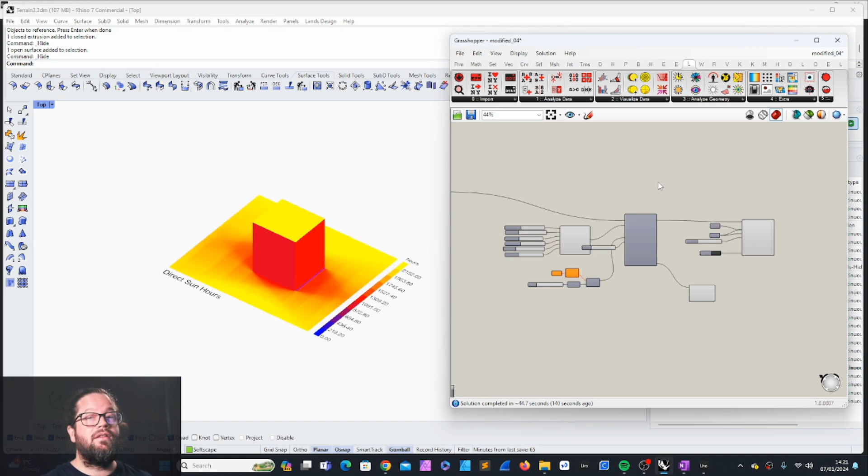We analyzed geometry, and we used the first item here, the direct sun hours. Now, direct sun hours is the first tool here where we actually analyze geometry. And back then I said we need to have a model first - some sort of model, ideally a simple massing model, in order to start using these tools. Now I want to dive a bit deeper because of what I said before.

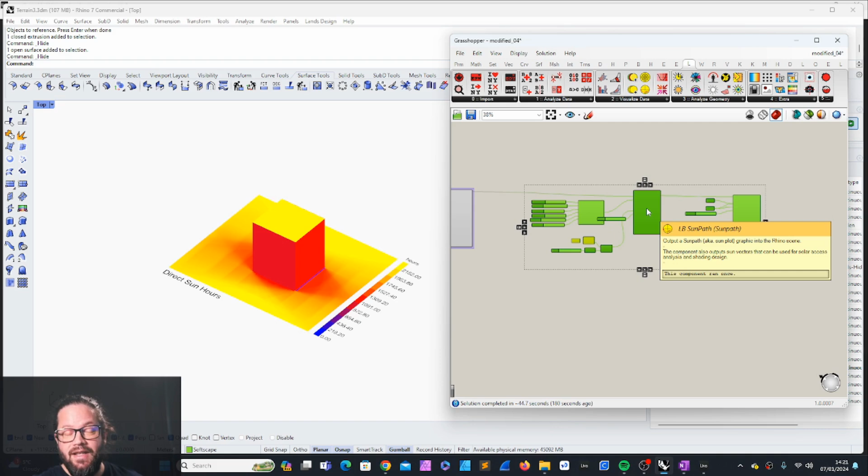A sun hour study is not just a sun hour study. What it's supposed to do is trigger a response. It's not just a tick box exercise because your client brief says you need to deliver a sun hour study. No, there you can set yourself apart from others - make a sun hour study, but then use it to your advantage.

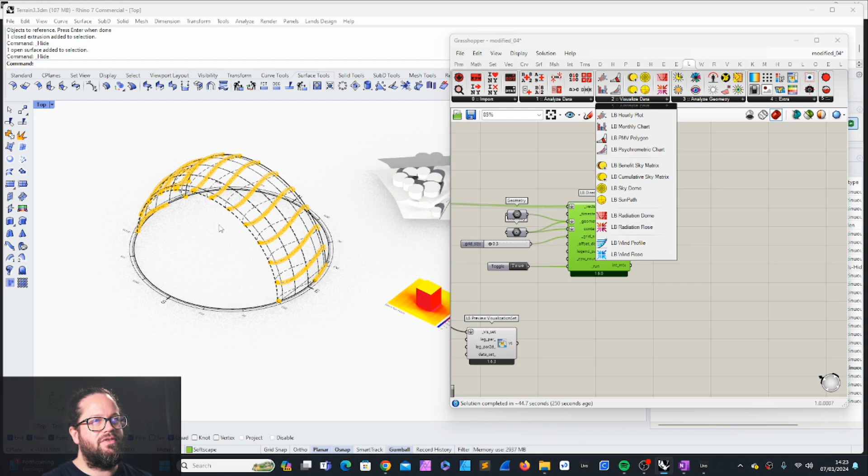Now I want to talk quickly about what a sun hour study really is. In that case, it's called direct sun hours - this is an important element. I'll read through this so you hopefully get a better understanding: calculate the number of hours of direct sunlight received by the geometry using sun vectors obtained from the Ladybug sun path component. So back then we built this sun path - this is our Ladybug sun path tool, and it creates vectors from the position of the sunlight to the model, and the vectors are used to create this heat map.

The heat map is not about temperature. It's about showing how much sunlight, how much direct sun hours were hitting the surface. I'll explain a bit more about that in a bit.

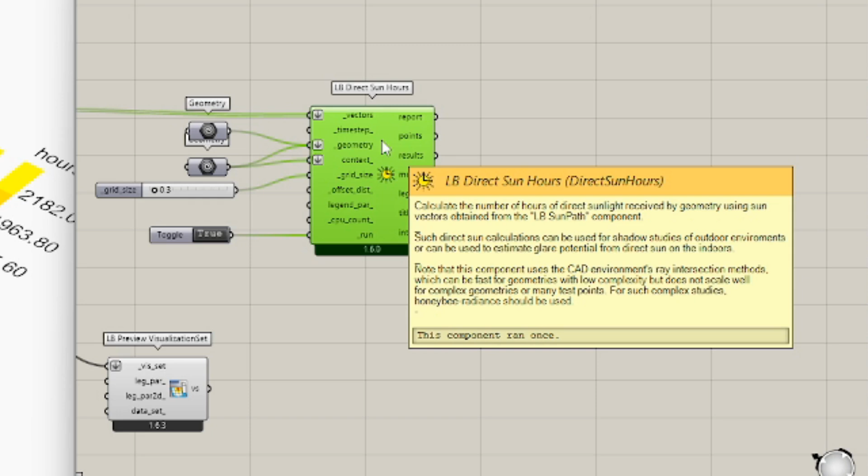Such direct sun calculations can be used for shadow studies of outdoor environments, or to estimate glare potential from direct sun indoors. There is way more to that, it's not just to create a sun study. That's already the misconception. Yes, sun study or shadow study, yes of course, but for what?

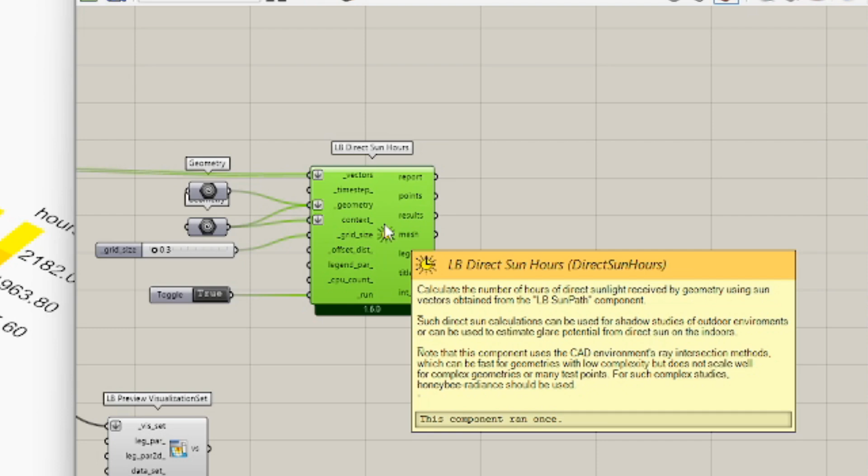Note that this component uses the CAD environment's ray intersection method, which can be fast for geometries with low complexity, but does not scale well for complex geometries or many test points. For such complex studies, honeybee radiance should be used. I agree, but this is the first point for you to understand what's going on.

What do we need for this study? We need the sun path, and we need the direct sun hour study tool. We need a geometry, which is the geometry we want to test, and we need a context, which is the shading element. In our case, I use the context also as geometry to be tested - in that case, the building. So in this geometry slot is the building, but it's geometry and context at the same time.

So for example, I could have a shading device, a shading element, and I'm not interested in calculating how much sunlight hits this thing. So I can just place it into the context only if I want that.

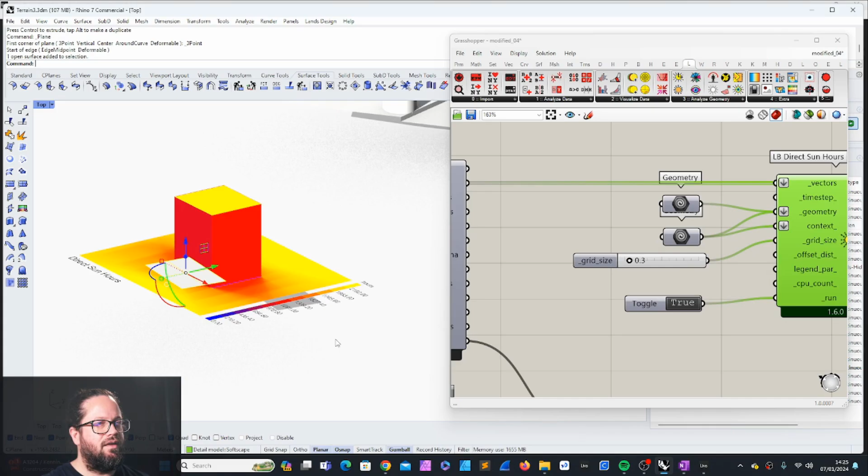Let's do that. By the way, don't do this - stop your grasshopper calculation and then choose your geometry. Not like me now, where I just choose the geometry and now I need to recalculate everything, although I haven't chosen everything yet. I will lock this first. If you click on your wheel, you can lock your grasshopper and then it doesn't calculate.

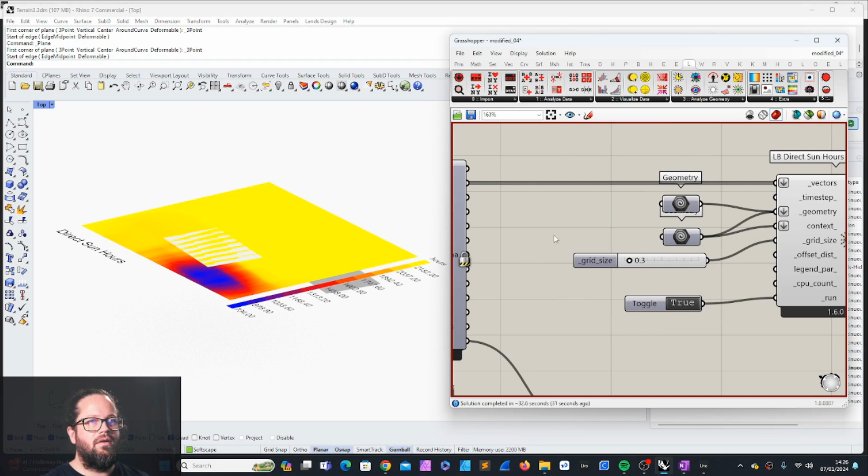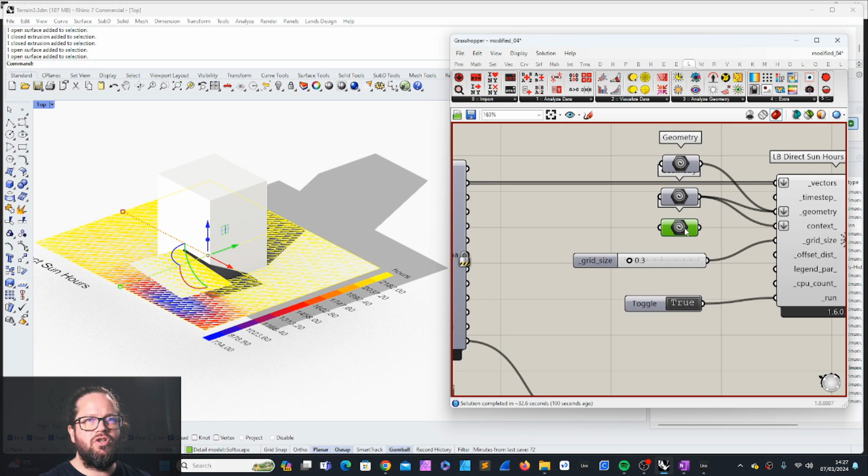As you can see here, we have the building, we have this shading element, and we have the ground surface. Now the ground surface is my geometry I want to test, and I also want to test the building, but the building makes shadows, so I also use it as context. Now I could add a third one here and say this is only shading, this is only context, so I can plug this in here together.

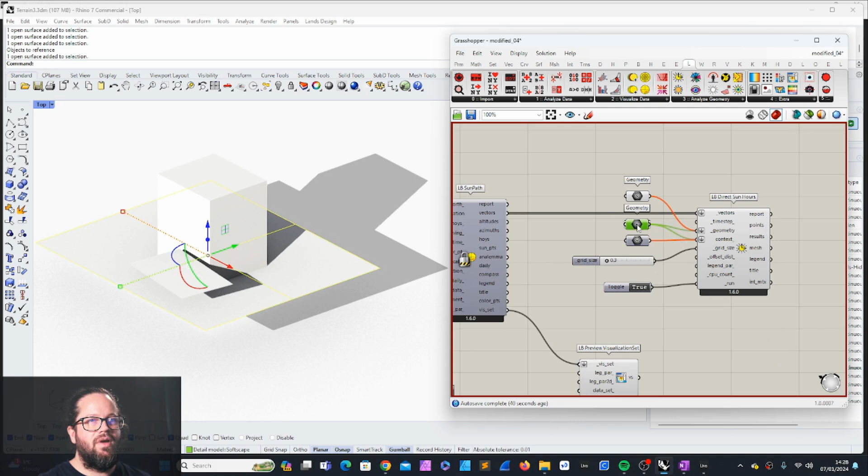So we have a geometry, which is what's here. Maybe I'll show - not disable, preview - oh, that doesn't work if it's locked. Okay, I have my ground plane here in the geometry, and probably the best way is to rename this. Anyway, we have our building in here, and we have our shading in here, which is only context - I'm not testing the surface itself.

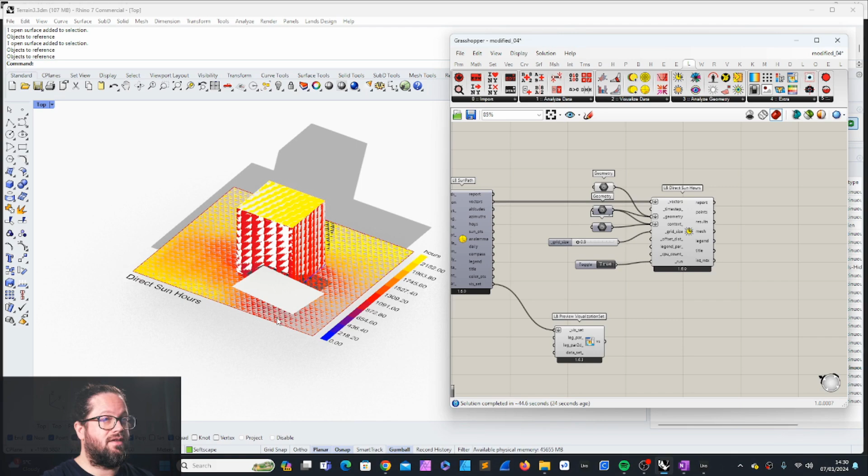So I can do this, and now I can unlock my solver. So that looks very weird, and a lot of people ask me why do I have these stripes. It's because this tool creates a new mesh with the colors baked into it. So you have your geometry in Rhino, and on top of that you have a mesh which has a color, and that's overlapping. That's why we can just take this and hide it.

Now you can see that we have shading here, this is from our shading element, and then we have building as part of the shading but also part of the geometry we want to test. And then we have the ground plane. So that's one thing, that's how it works.

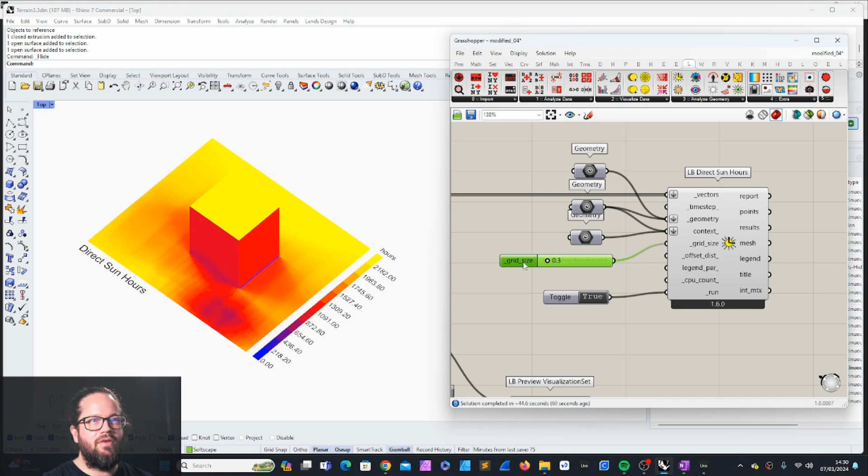And then we have the grid size. This grid size is actually quite small, that's why it takes quite long. I will change that so the calculation is faster. Go back here and I'll say 1 meter grid. I will just turn this on again.

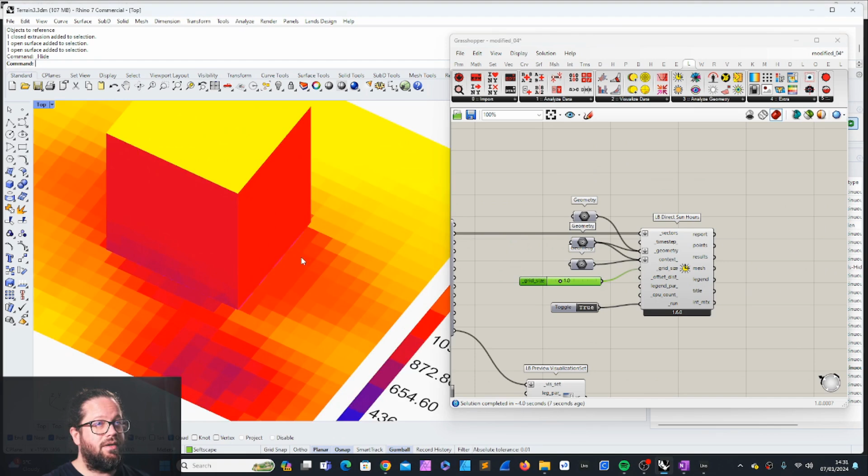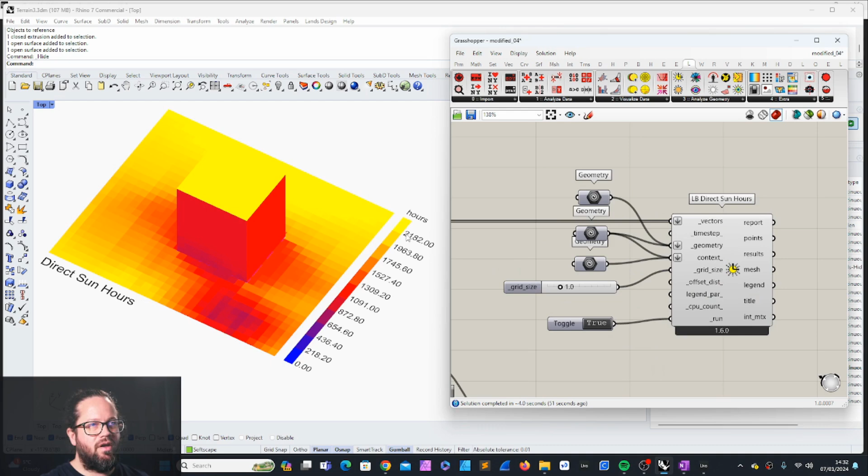So now it's probably better to explain what's happening. It says here hours, 2182 hours. Yellow means that in the testing period, which in that case is a half year, from January to June end of June, there are 2182 sun hours on these yellow bits. That means yellow areas get the most sunlight.

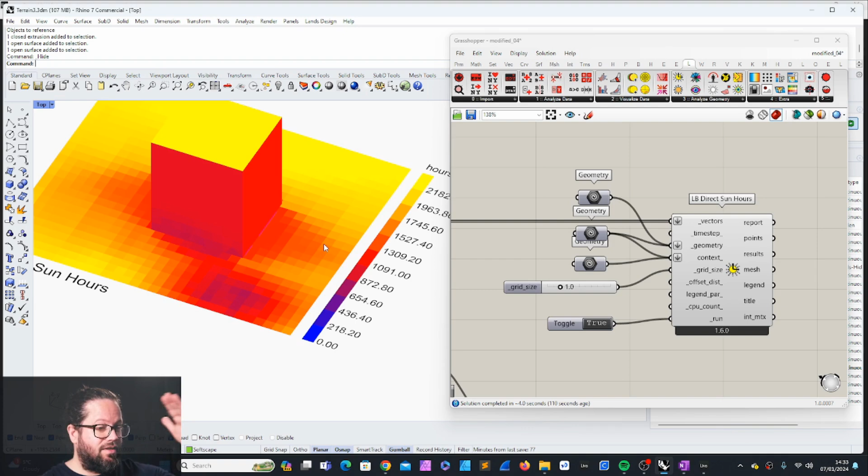So imagine how it works. The sun comes up, and on each of these squares it's tested if the sunlight hits the surface or not. If it does, it becomes 1 point. If not, it becomes 0. Next hour, a few others which were before in the shadow now also get the sun, so they get 1 point. So then some squares have 2 points, one has 0, one has 1 point, and so on. It goes through the whole year or half year or whatever period you choose, and adds everything up for each cell, giving you the exact number of hours per cell.

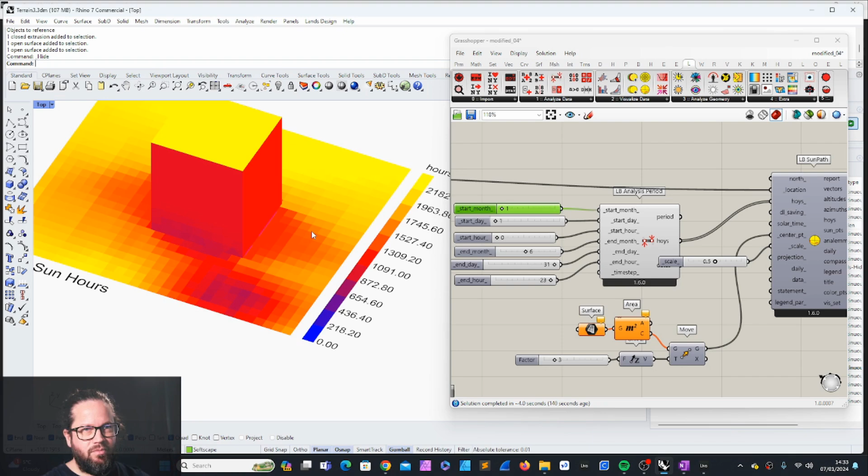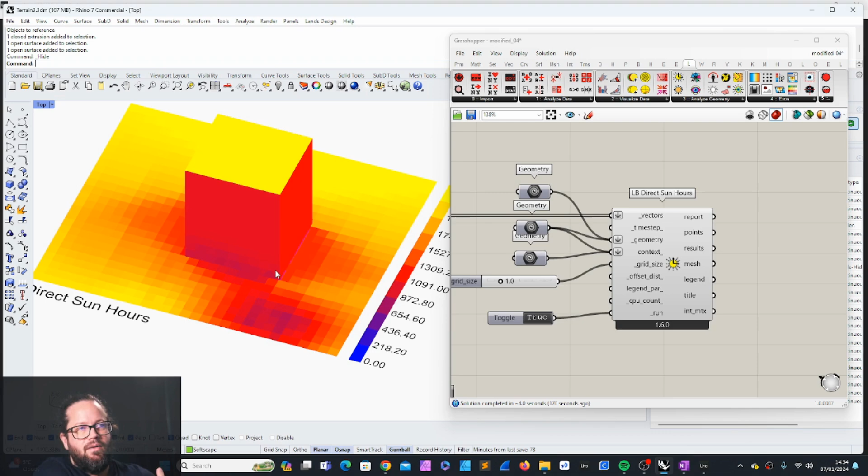And we talk about direct sun hours. There is no reflection from any surface, it's only the direct sun hours. It's very important, a lot of people don't understand that. They think, oh, I'll never get any sunlight here, so these spaces are completely useless. It's not true, because you get daylight. Daylight includes the sky also, so skylight, reflection from surfaces and so on also creates light. But this study is only about the direct sun hours.

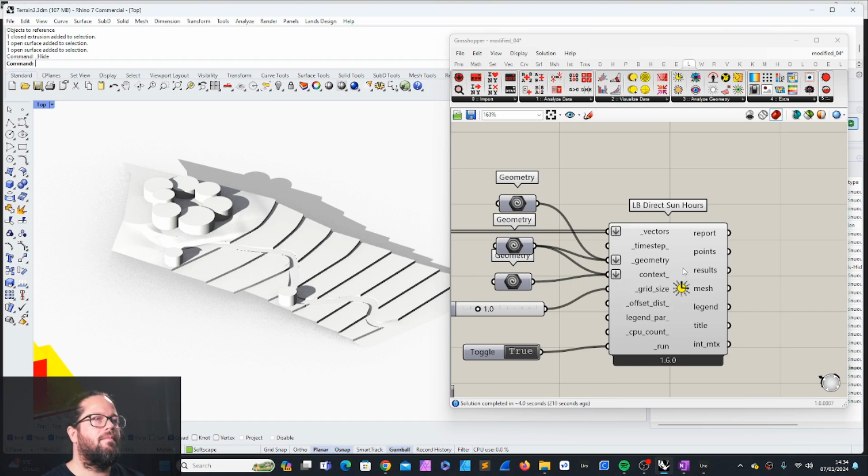Now, as you remember, we have our model. We created a simple model, that's what's in the description also. We need a simple model in order to run this, otherwise the calculation is quite long. You can run more complex models, but it's better to use Honeybee. In that case, I deliberately created a relatively simple model where we can run our sun hour study, and I will not use this extra shading.

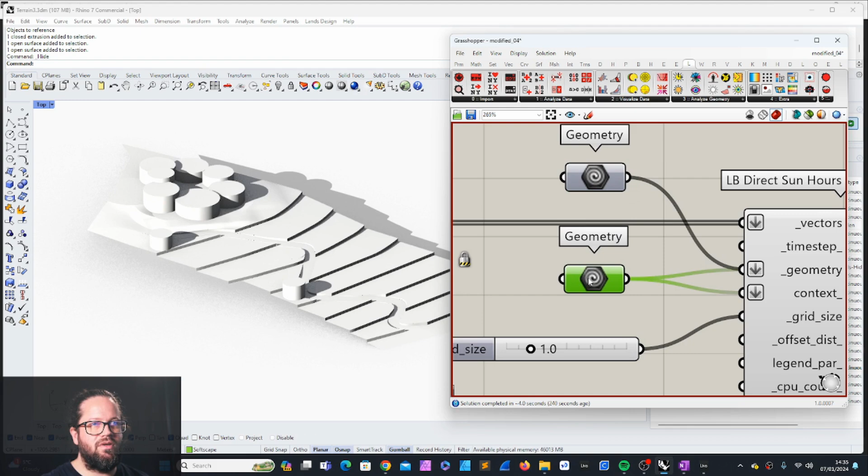Let's lock this again, I'm gonna delete this. I want to test everything, so I don't actually need this part here. I'll just take everything and put it into this geometry slot. That makes sure that I use everything as context, but also as geometry which should be tested, so basically self-shading elements are included.

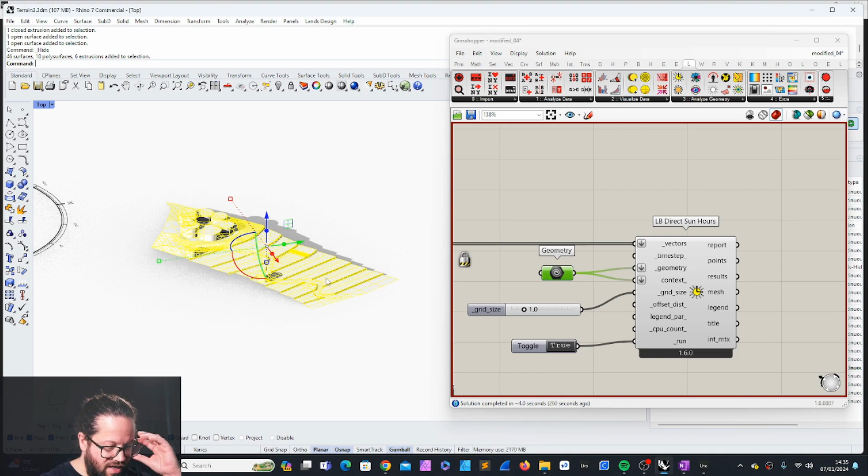So I go here, check first. Let's see... okay, 46 surfaces, 18 poly surfaces, 6 extrusions added to selection. I just check this because I want to make sure I don't choose any lines or curves and so on. All right, so I can select all this and then set multiple geometry.

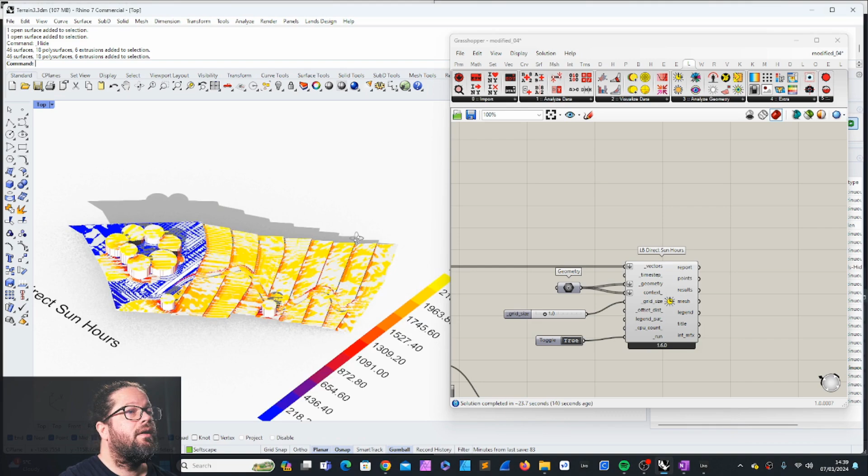Now this will take a bit, but let's do this. Just unlock and let's see how long it takes. Okay, that was fairly quick, and we already can see there's a problem. So I will go back here, I will lock this, and we need to fix some stuff here.

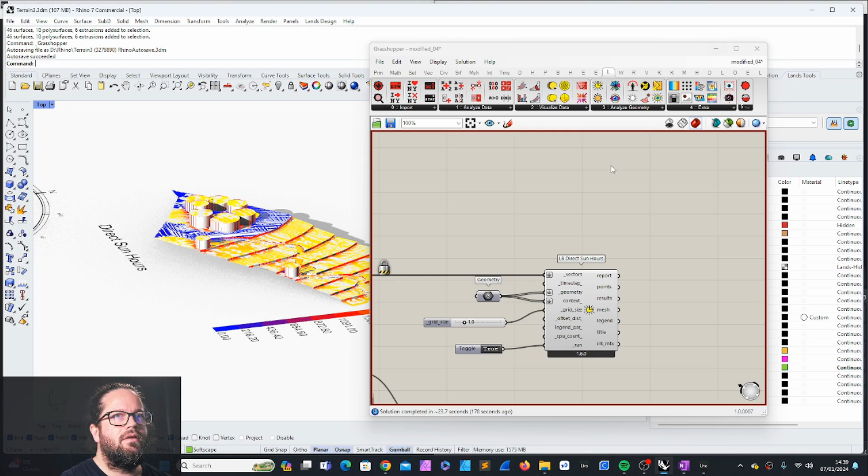Maybe let's hide this first. By the way, closing this window doesn't remove our Grasshopper script, it only closes it. So if I click here, it's still here, everything's here, even the calculation, nothing's gone. If I just minimize it, you will still see everything. If I click it away, then it's closed. And that's what we want, because we need to fix something here first.

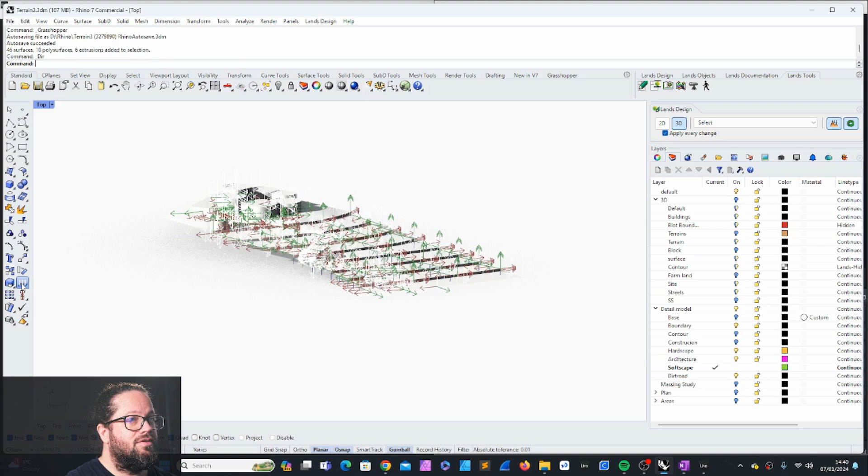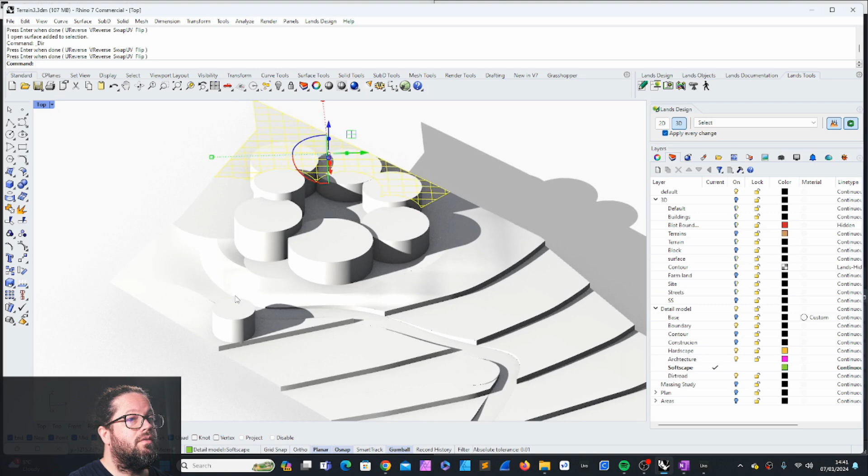This is a problem that comes up quite often, and people are confused why this happens. I need to check my orientation of the different surfaces. It seems like the surface, maybe let's go back here. This is actually quite good, so it seems like these are all fine, but these are not. There's something wrong here, it's the inner courtyard, and also this one. See, it's upside down. Let's check this one, it's also upside down. This one, that's correct. Maybe it's easier with the shaded viewport. That's now okay.

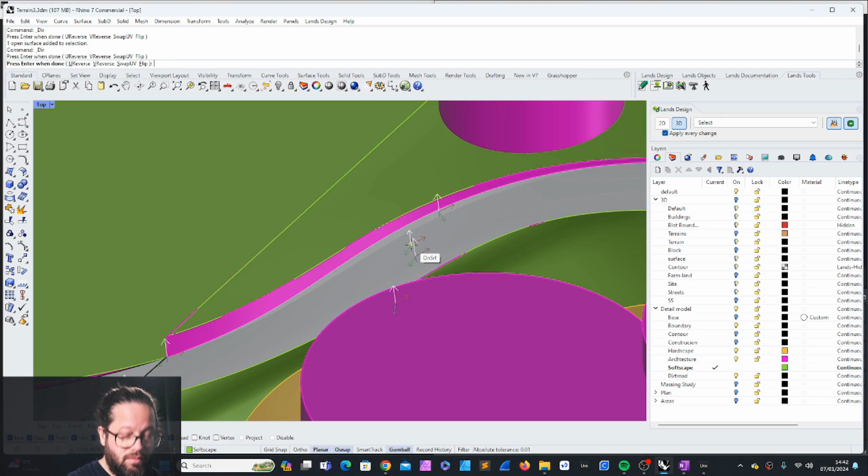This needs to be flipped. That's good, that's also good. This is wrong, now we can do it again. So flipping these makes sure that we calculate the sun hour studies on the right side of the geometry. Otherwise it shows blue, says 0 hours, although they're completely exposed, and a lot of people get confused by that, they don't know how to deal with this. So I just unlock this again, and let's go.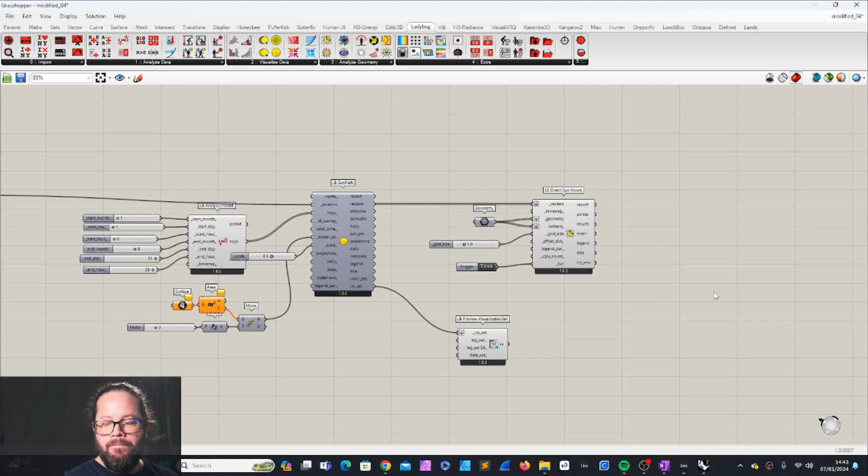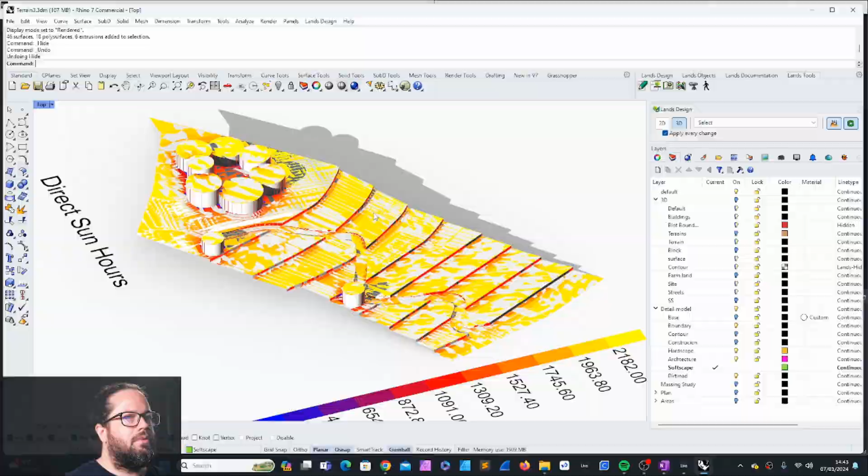And because we use a meter grid, it actually goes very quick. Let's go back to the rendered viewport, and what I want to do is grab all these and hide. Oops, that was not good. Why did this happen? For some reason there's some bug here with the rendered viewport. Anyway, we can just use our shaded viewport instead. It's totally fine, because this is a colored mesh anyway, so no problem here.

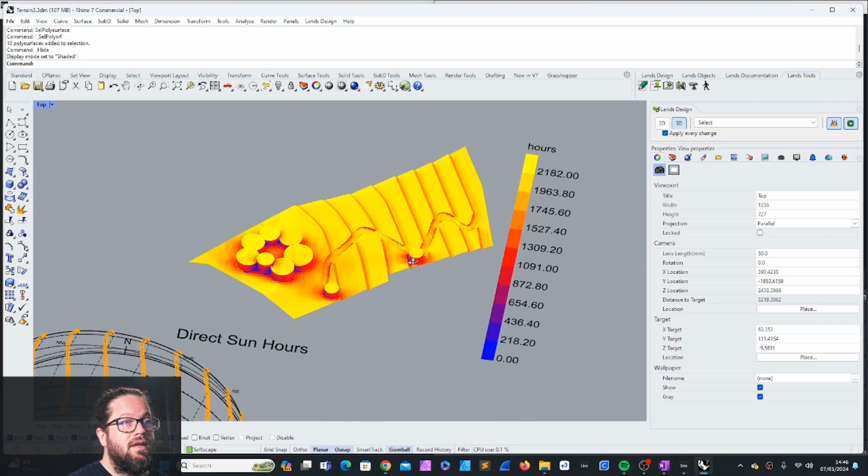Now, so we have our sun hour study, and this is for a half year. It's faster than calculating the whole year, and the sun will pretty much move in the same way, just reversed. So that's why if you want the whole year, you just add up or multiply these numbers by 2. It's gonna be more or less the same output, really.

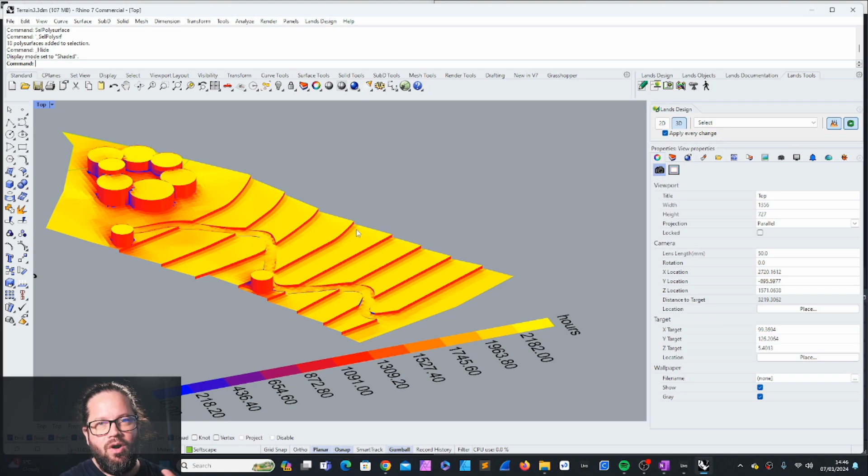A few things to say here on this output. Although we try to generate the grid, some surfaces are harder to create this grid surface on top of, that's why they look more jagged. They have these triangulated edges.

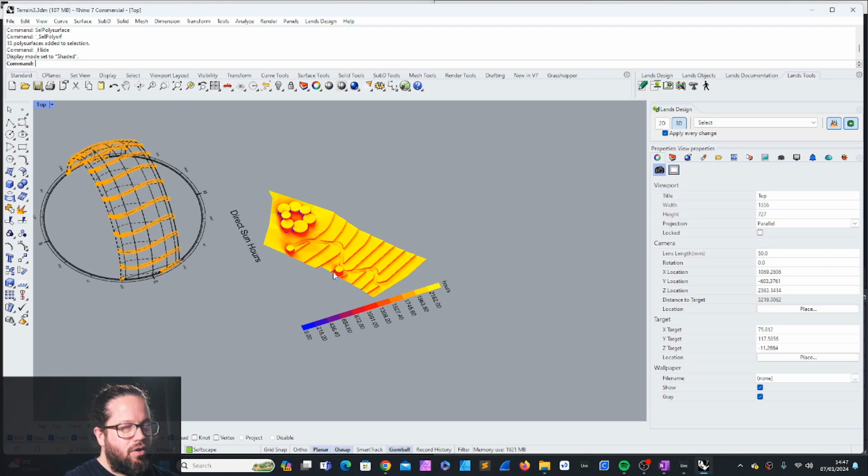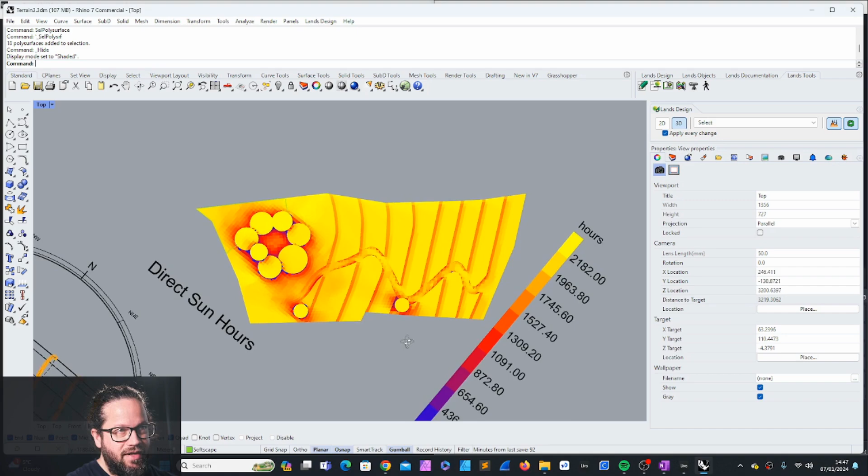Well, we get a lot of sunlight, no question there. We haven't yet put any trees or anything, but we can see that we get less sunlight in here. That means because it's a courtyard, sometimes you get no sunlight in the morning or in the afternoon, whereas all the other areas actually still get sunlight. And that's actually a start for us on how we could use that. Now imagine this in a different place, because this is very close to the equator. In a more Nordic country, for example, it would probably be much different.

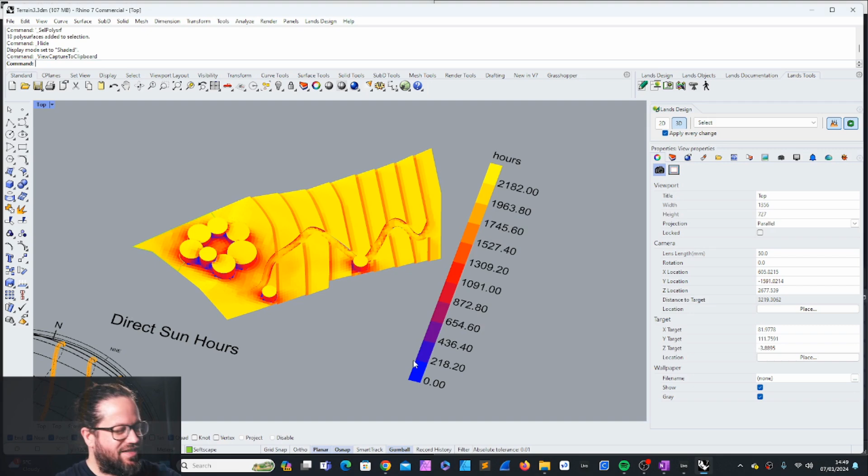What can you use this for? Because I promised that I would show you what is it good for, what is the sun hour study really good for. Let's talk about what options you have in order to use it in your early design process, and then we'll talk about when you should not use it.

Well, for example, shadow studies for architecture. Why is it important? In dense cities, in that case maybe less. So architects and urban planners use the sun hour data to analyze how the shadow is cast on neighboring buildings, and that helps to place the building on the plot to avoid too much shadow on the neighboring building, for example. You need to take that with a grain of salt, because in some areas you maybe want to have shadow. For example, I lived quite a long time in Shanghai. In Shanghai, in summer, actually the tall buildings create a nice shade. Don't get me wrong, it's a nice shade. So you could argue that, and then of course in winter the shade is terrible, because it actually cools the space down quite a lot.

But here you can see already the first use is the placement of your building on the site. Where is it best used on the site? Where does it create the least impact on the neighboring buildings, either too much shadow or too little shadow? Of course, if other buildings, for example, use solar panels, you probably don't want to create any shade on the neighboring buildings, or very little shade on the neighboring buildings.

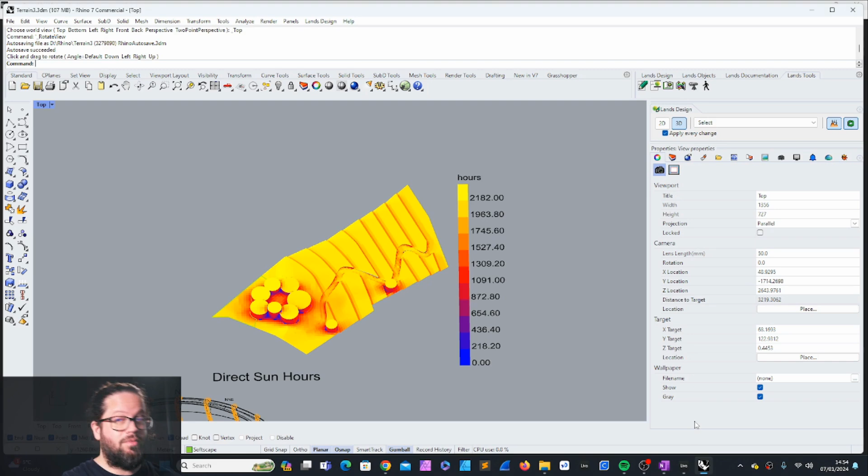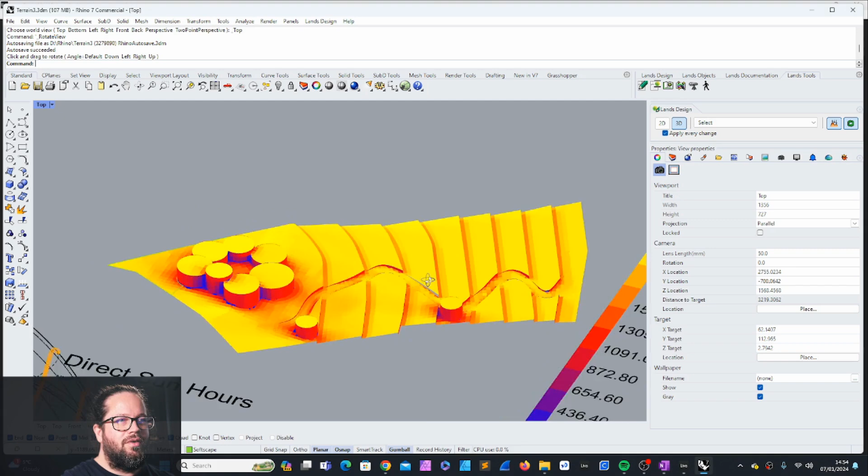Where we come to the second point: sun hour studies also help to locate your solar panels. In one of the previous videos, we talked about the orientation of solar panels. In that case, because we're very close to the equator, the position of the panel is pretty much upwards. So actually, we don't need to check much here. We know it's upwards, but which are the areas where it suits best? In that case, it would be, of course, the roofs, the roofs of any of these.

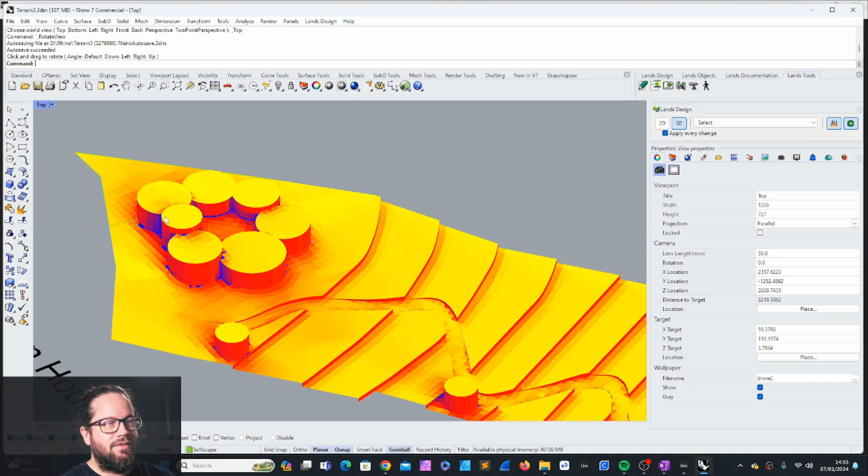Well, we haven't yet put any trees, so the trees might have an impact as well, and we'll probably do that in one of the next videos. The placement of solar panels is crucial. So you could have a diagram in your first concept showing the areas where solar panels are possible, and then you can work with an engineer to figure out how many solar panels you want, you should have, and where they are located, and they can then confirm the right location.

This would be part of what I believe architects or landscape architects should do. It should be part of the design process to think about these things.

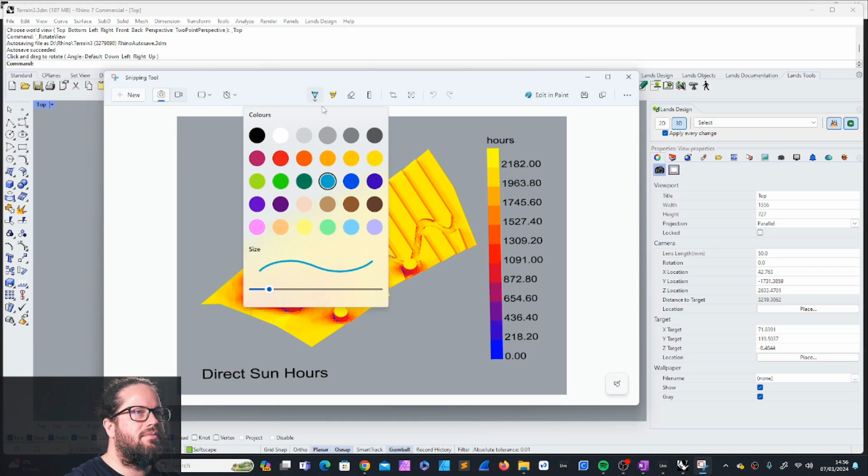I could use my snipping tool here to explain it better. With this I already have quite some information to say which areas are actually useful for solar panels. Definitely this one here. Then here I actually have a bit of shadow, so it might not be ideal. I have these areas and the top, and here is a bit of shadow.

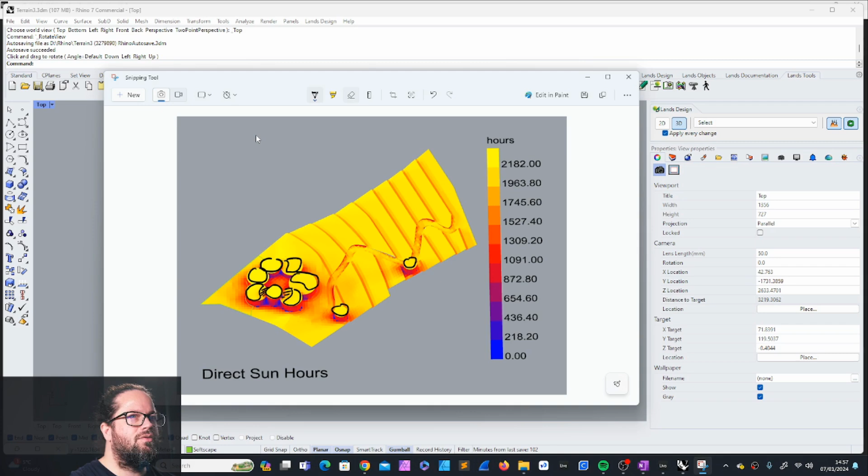Now that could tell me already that I might need to change the geometry of my building a bit. If I want to use the whole roof, then maybe these roofs should all be the same height, so they're equal, and I can use solar panels everywhere. So you can see there's already the next thinking process of your design.

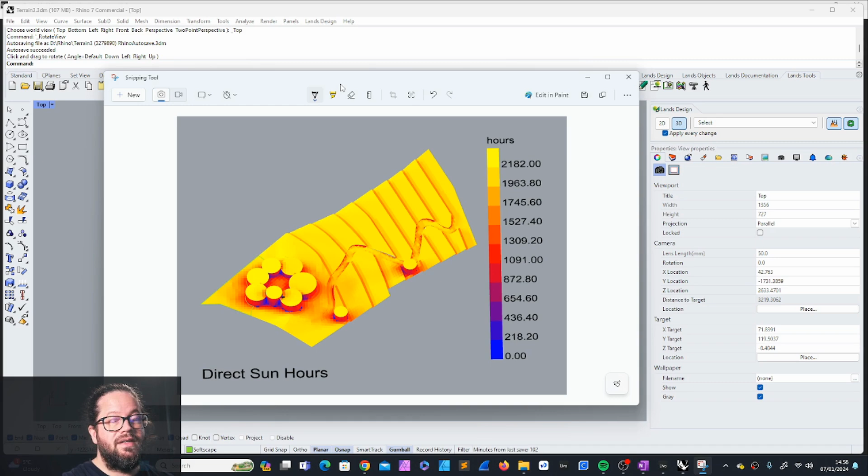What else? It can be used for glare assessment. In that case we probably would need to do more studies, like studying the mornings. We can do it very easily — we can say which time of day is best for which activity, and glare assessment is one thing.

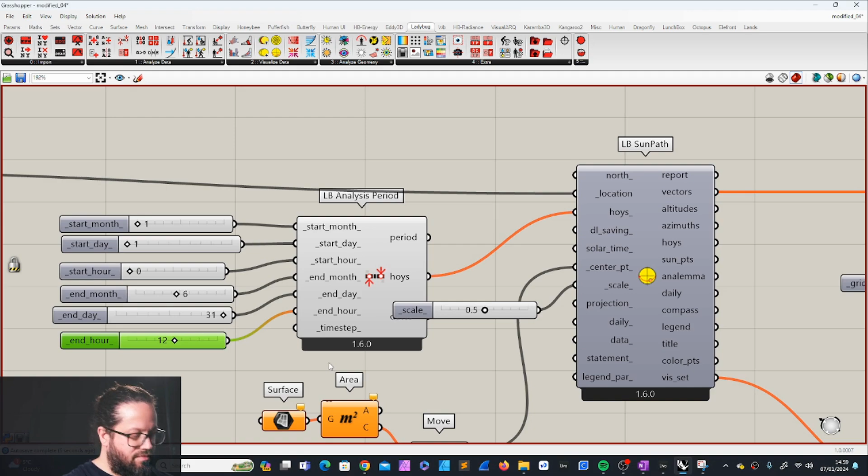Let's close this here again just to make sure we don't do something wrong. Let's say 11, or maybe 12 — it's from midnight to 12. The sun path will automatically just choose the right vectors, so all the hours where there's no sunlight won't be counted anyway. Let's start this again.

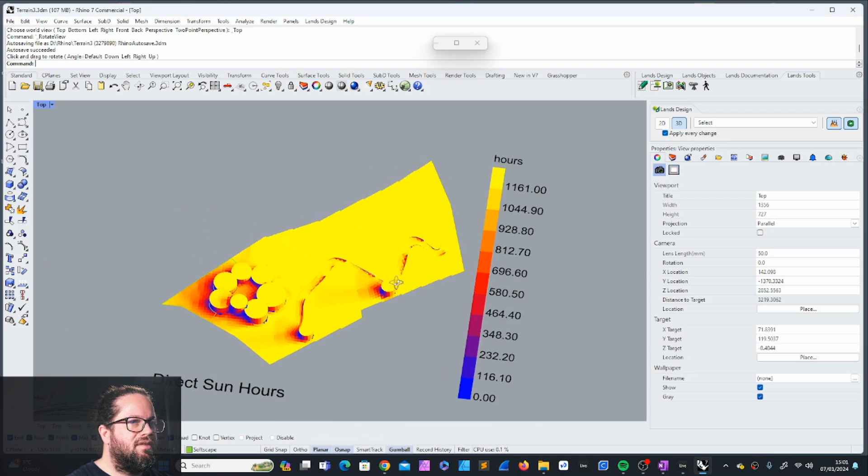Now you can see we're only testing the hours from around 6 o'clock in the morning until 12 o'clock. We can see here most shade we have on that side, and most sunlight on this side. That could inform, first of all, what the program is inside the building.

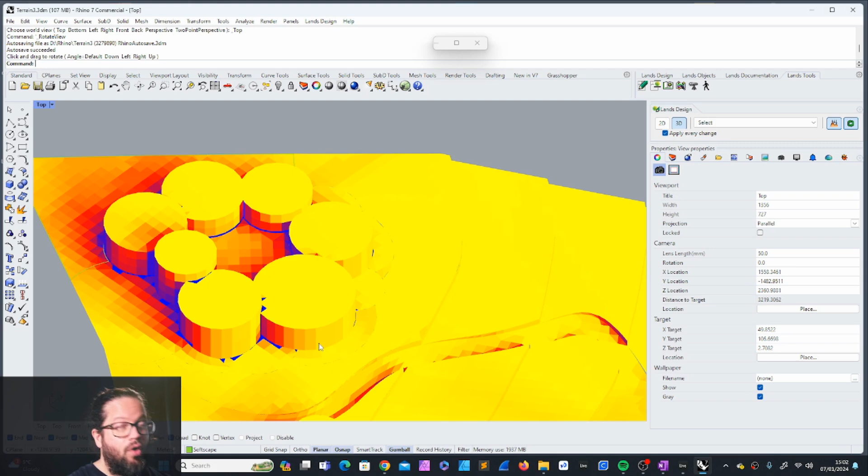Based on what we discussed before, we had office, sleeping quarters, and so on — maybe that's something to think about, where do I place the right thing. My office, for example, may be better located on that side because it gets daylight but not too much direct sunlight, whereas this side is actually super exposed to sunlight. So we need to think about that.

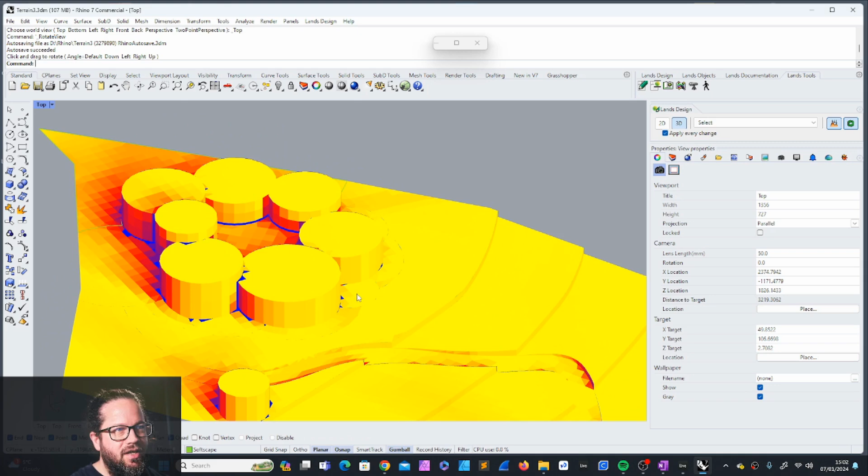That could inform, for example, your facade design — do you need special self-shading elements? What is the program inside, and how can we prevent too much glare?

Speaking of program, it doesn't just show you the program inside, or give a clue what the program should be inside the building — it also gives you an idea what it could be outside.

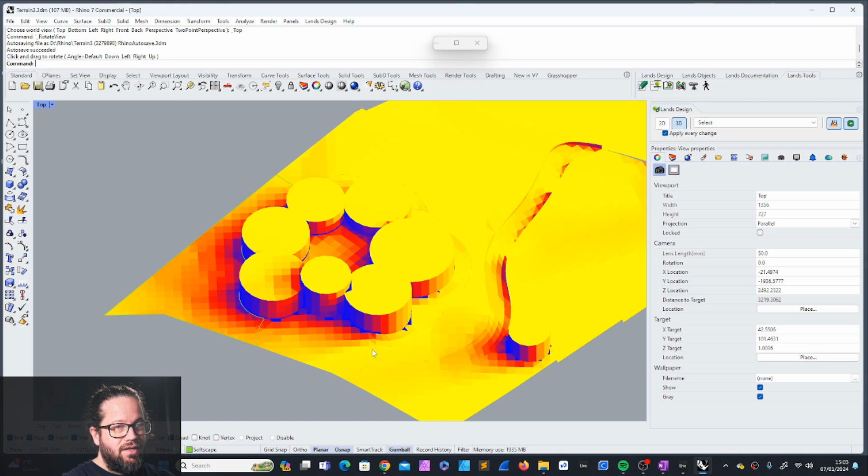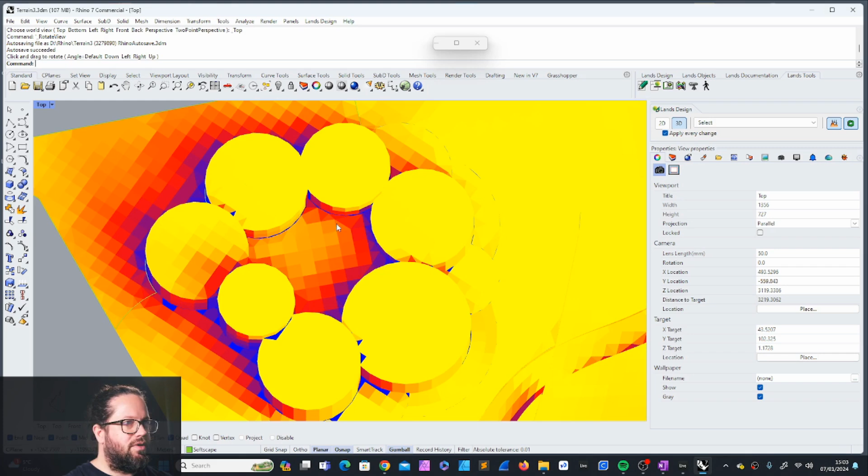In the morning we have quite some shade here that may be beneficial if I have a small market — women go there in the morning, buy some stuff from the farm, and it could be good that there's a lot of shade. We also want to add a tree here, which will create some shade too. We have the courtyard, which has some shade areas allowing for spots with a bit more sunlight but also areas with shading, so that could be beneficial — a flexible space where you can shift your activity depending on where you need it.

We could also now look at the evenings — for example, what's happening in the evening.

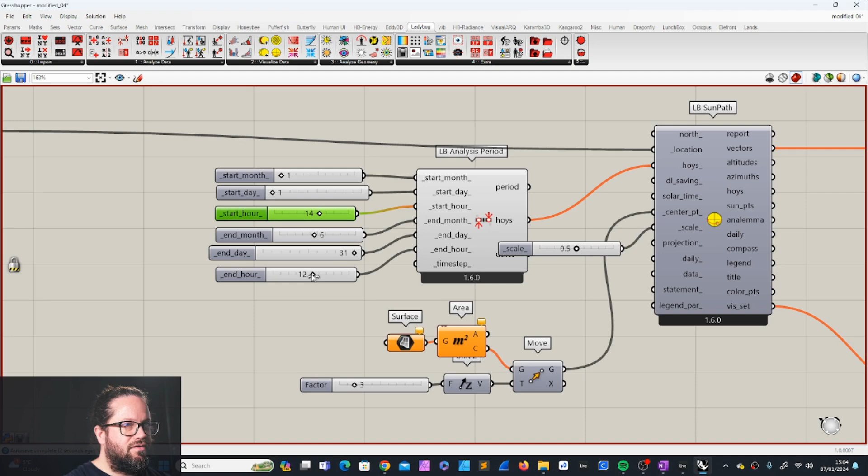So if I go back to my script and say, how is the sunlight from, let's say, 1 or 2 o'clock in the afternoon until end of day. Let's lock this again, and we can have start hour at 2pm, end hour at 11pm. Unlock. All right, very different.

It's good that all these planting areas still get sunlight, but at the same time we have more sunlight on that side, which is interesting. That tells us we might want to reconsider a bit what the program is around this building.

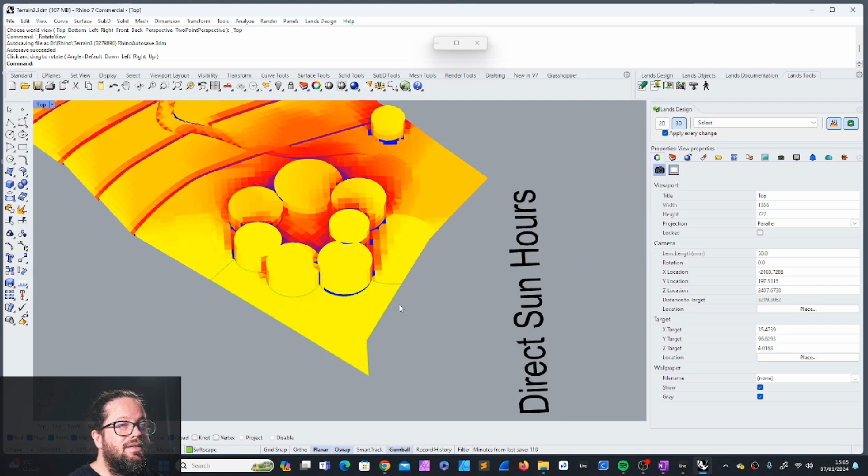Is it better to have our car park here where there's less sunlight? It could be nice that the entrance space, or this welcome plaza or welcome square, has quite some sunlight, so that allows for activity in the evenings. Maybe the market continues in the evening, with some food stalls or selling produce, inviting people to stay there.

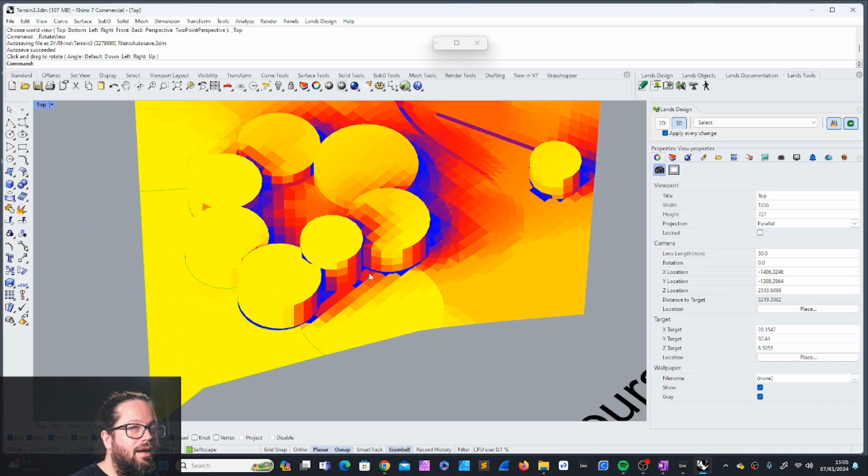It also shows us a bit about how the sunlight behaves in the evenings for solar panels. So you still get a lot of sunlight on the highest rooftops, of course. But we could now look at our initial program and see what we're allowing inside here.

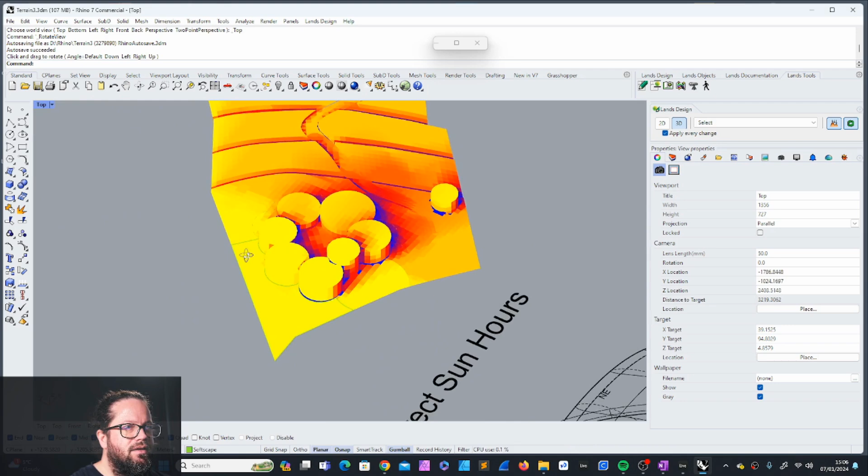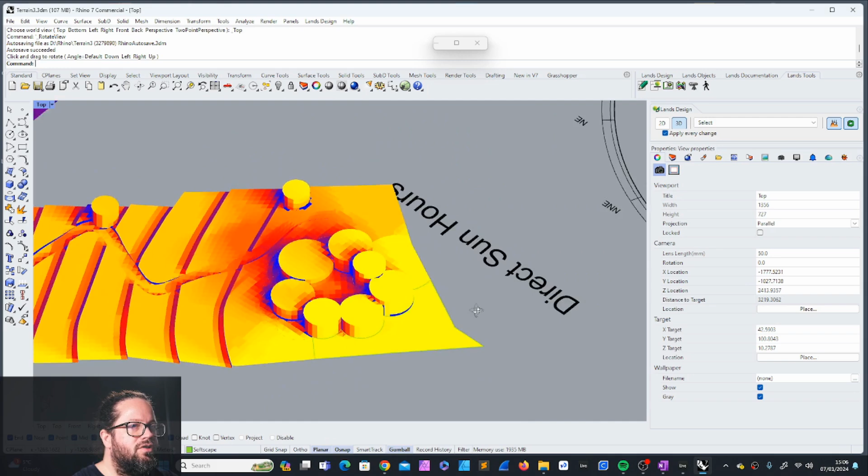So for example, if this is office, and in the evenings people are moving more to the living quarters, then here it's more quiet in the back, and here you have the glare on that side. Maybe your office hours are already finished and you don't need special treatment here because you're not using that space that much. On the other hand, if there is a children's space, or living quarters or sleeping areas, we might need to think about that, if that makes sense.

But that's how you could use the sun hour study as well.

And you can, of course, go into your analysis period and be very specific with the days you choose. Maybe you want to select a certain month, especially if you're in a different country, more northern, in the northern hemisphere, and you want to test specific months very carefully.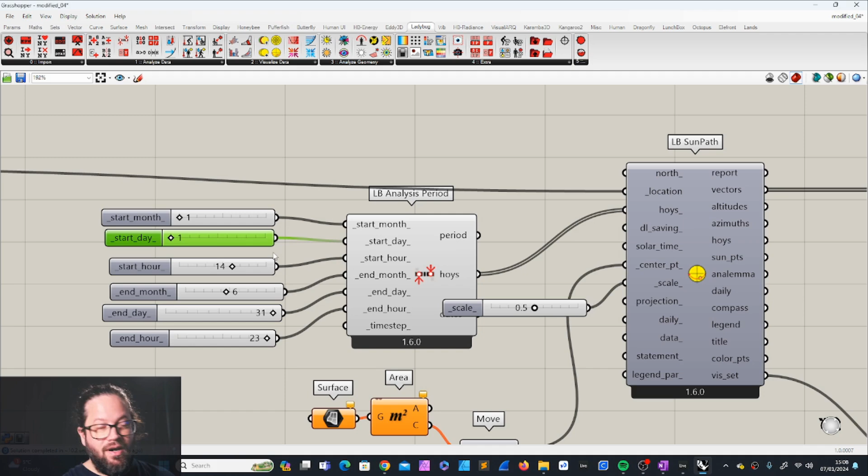Are there any holidays or festivals where you want to test one specific day? Or you have an outdoor event space, and you want to test how successful that event space could be during certain months where you have certain festivals. So there are many ways to think about how to use this.

On my list is also outdoor seating. It goes hand in hand, of course, with the outdoor activity. Here it could be nice, if it's very hot days, to have shade in the afternoon, with the building shading these spaces where you can sit outside.

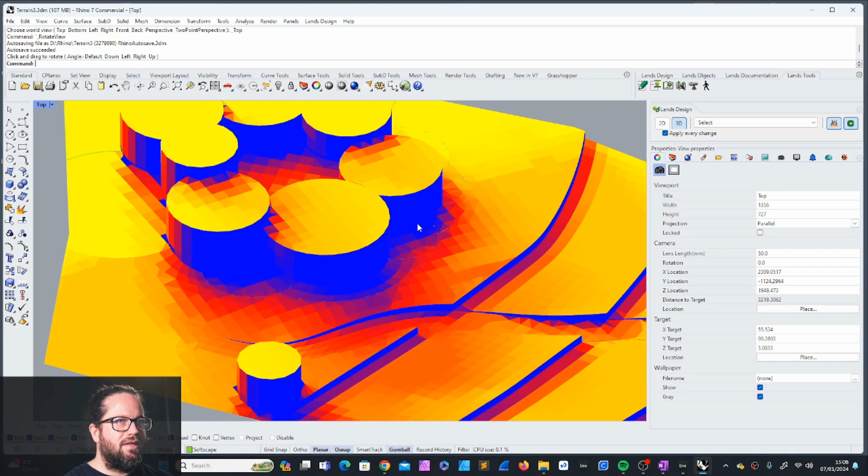Another very big aspect here - although in our case we're so close to the equator, the light is distributed quite equally - is that in a northern country like the UK, for example, you always have a north side which is darker than the south side. That plays a big role in, for example, vegetation and planting design.

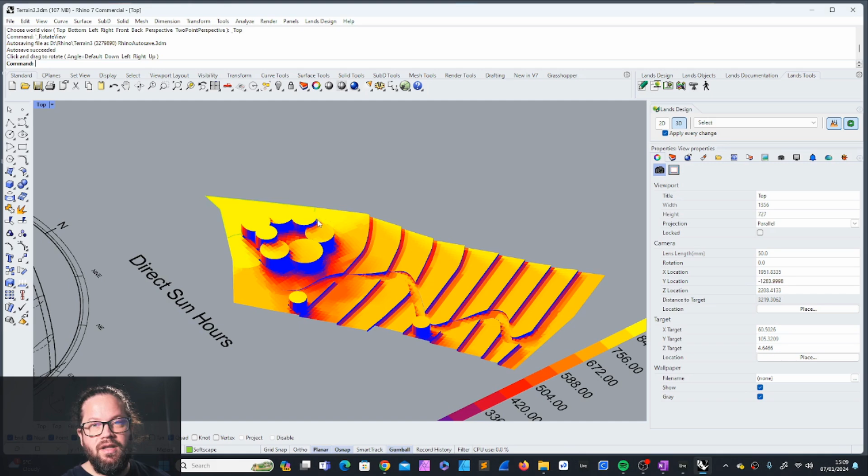You get a very clear understanding of which areas are suitable for plants that need full sunlight, which need a half kind of situation with partial sunlight and partial shade, or plants which are in the shade.

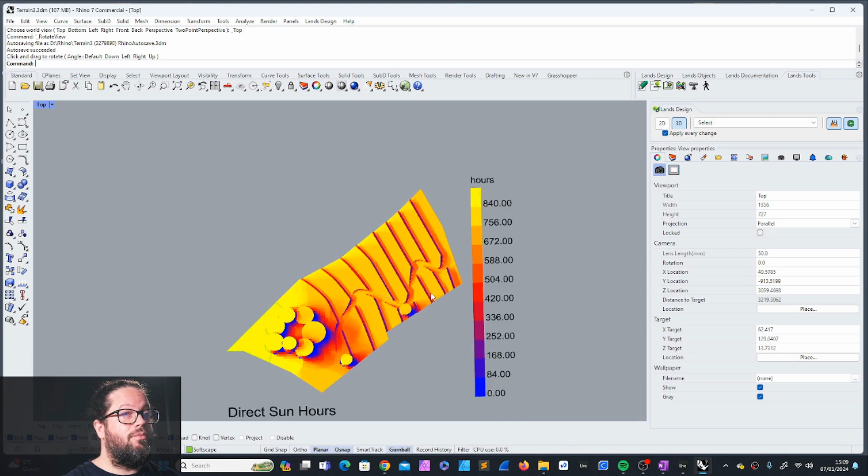For example, if I use this diagram here, and assume this is my distribution over the whole day from a period from January to June, then I could specify, based on the plan, where are the areas for plants suitable for full sunlight, partial shade, and full shading.

I do this all the time in my design. For example, here, say the areas - we have 1, 2, 3, 4, 5, 6, 7, 8, 9, 10, 11. It's not very equal, but I could say, okay, this area here is full sun and then shade.

And we always have skylight, by the way. So some plants only need skylight - they need a lot of skylight, but they don't need direct sunlight.

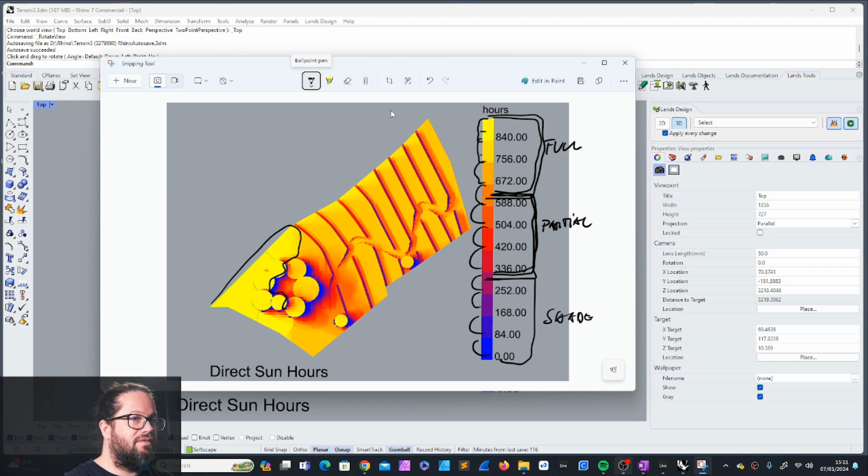That gives me a very good idea on a broad level of what kind of plants could be suitable. And if I have plants on my roof, and I'm marking mostly this upper area here, that gives me the full sunlight, including these areas.

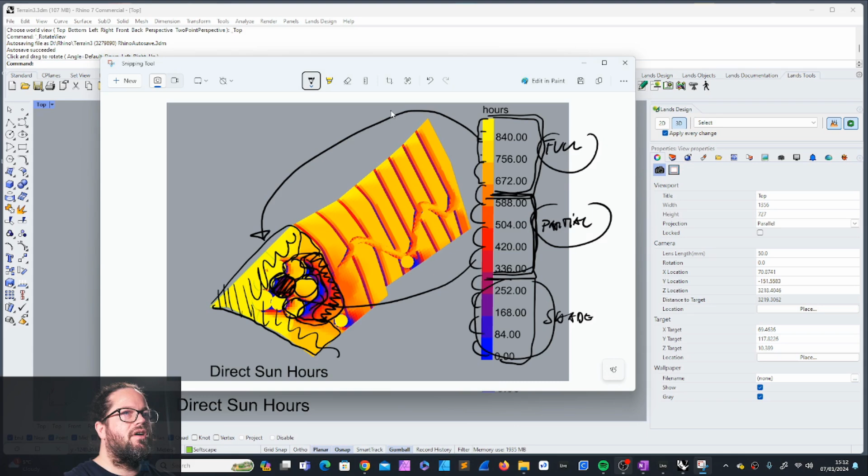Then I have the partial sunlight area, which is inside here, and then I have shadow areas, which are these blue areas. This is not a very good sketch, but you know what I mean. You could bring this into a very nice illustrated document.

Now this is already half the deal of a planting plan. Now I can choose species for this area, this species for this area, and these areas. There's also something about a first idea about the outdoor comfort, heat island effect.

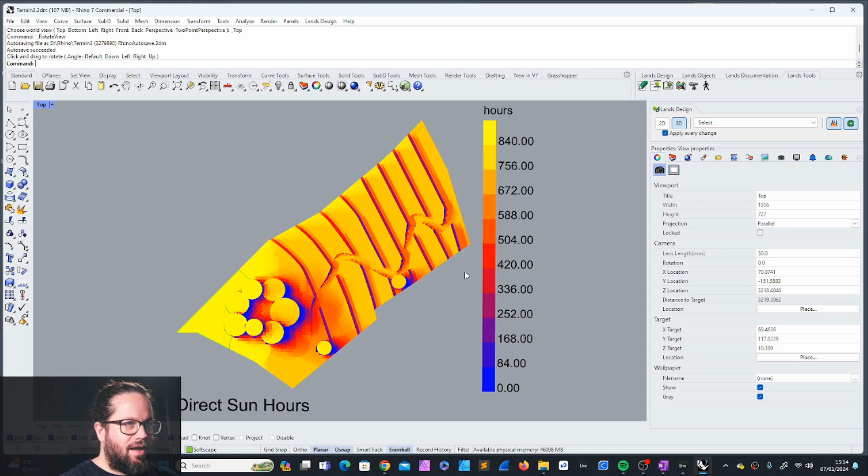What if I don't have solar panels and these are just concrete buildings? They accumulate a lot of heat on the roofs. Would it not be better to have, for example, green roofs? So things like that, heat island effect, could be a first indication of where I might need some design solutions.

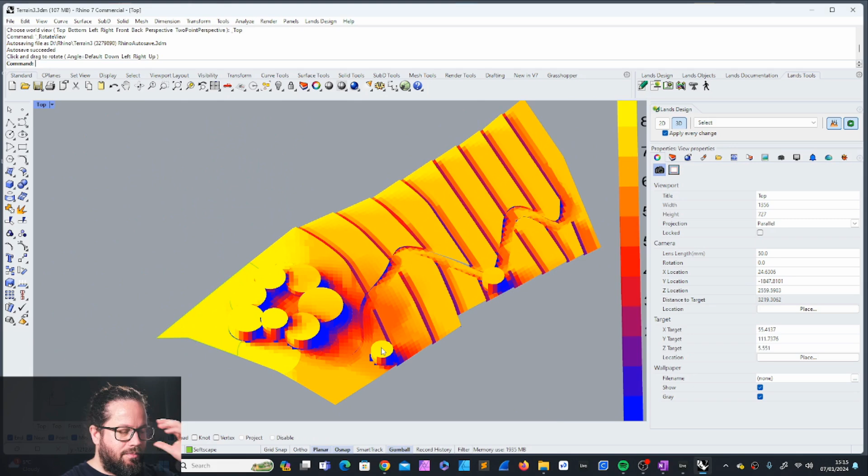Again, the placement of windows, we talked about it before, glare, strategies against glare. Is it the program inside, but also the size of windows? Maybe on areas where you have loads of exposure, you might want to minimize your window, or place it in a certain way.

In colder countries, you might want to use the window openings for heat gain. You want to actually get a lot of sunlight into your building, and that will help you save cost on heating. So the next step would be going to daylight studies.

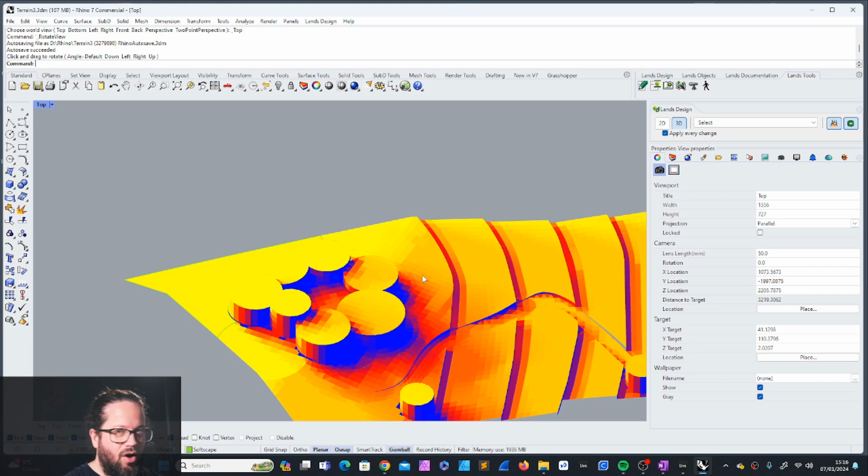That means, for example, if I have an office building, I want to have a lot of daylight, but I don't want to have direct sunlight. So again, the direct sun hour study helps a lot to understand your design from a very early stage, and you can make informed decisions of what comes afterwards.

For example, the daylight study with Honeybee. And we talked about event planning. So event planning is one of the big topics.

Where do I have sunlight? Orientation of football fields, by the way—there's architects who don't know that. There's a certain way on how you orient a play field. There's a very strict standard on how it's placed towards sunlight, so there's no glare, or players have equal conditions.

That's something to think about. Events—you don't want to have glare into the people watching a play. So if you want to watch a play and then you have sunlight going into your face, then what's the point? You need to think about that. Are you glaring the people who play on the stage, or are you glaring the people sitting in the audience?

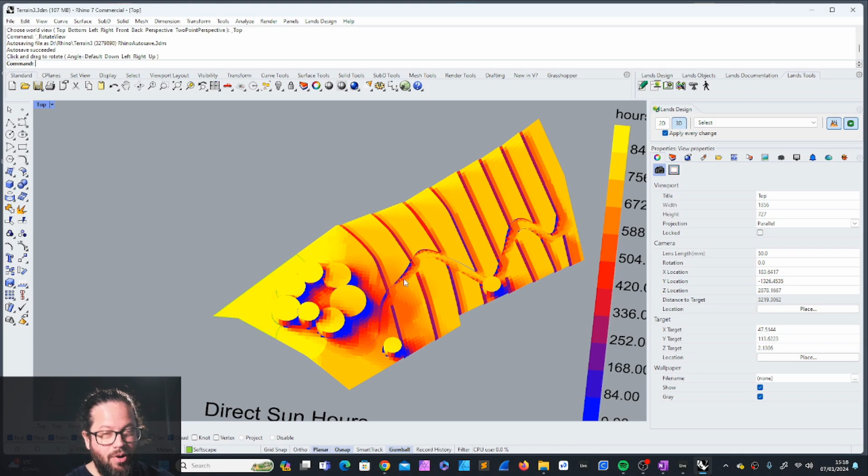So thinking about all these things can help with a sunlight study, a direct sun hour study. And it's not just the amount of hours, but where the sunlight comes from and during which time of the day. That's quite a lot you get out of this very simple analysis, and I think it's super valid—it's a very important analysis.

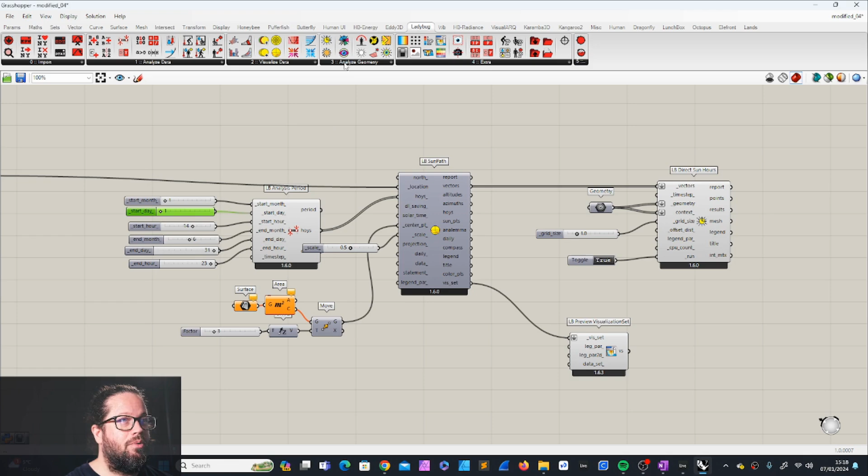And in the next video, we will look at the incident radiation, which is equally interesting. All right, so now back to the original title of the video: why, and when, you should not use a sun hour study.

Well, don't use a sun hour study if you have finished your design and just to tick a box, creating a sun hour study completely for nothing. Then you have failed the task. Do your sun studies when there's still time, when there's still possibility to change your design.

Of course, it's good to do a sun study afterwards to verify what you changed. Very often I got comments in the past where people design everything to the last detail and then do a sun study, and first of all it takes hours to calculate because they have all the details in their model, and second, they did a sun study just to tick a box in their presentation. But that's not the point of a sun study.

So please remember, we all need to change our thinking on that. That's why you shouldn't do a sun hour study at the end of your design exercise, or just to tick a box. That's when you should not do a sun hour study.